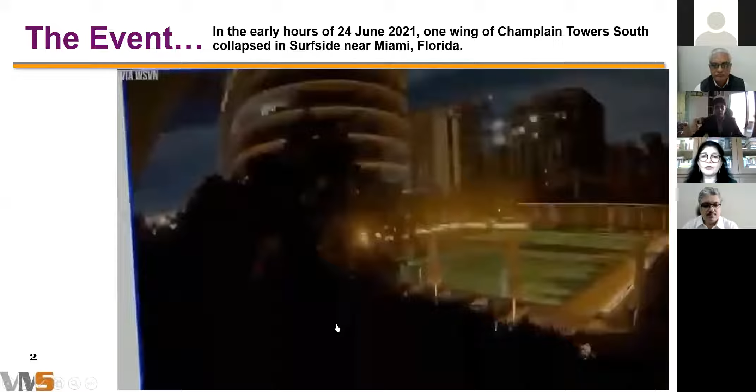Just so we have some idea of what happened, I would like to take you through what happened in real time. What you can see is the central part collapsed, and then the easternmost part of it collapsed. I think we need to keep this sequence of collapse in mind as we go further.

I think one good thing we have learned from this is how cities react and respond to such a disaster. The town of Surfside, just off of Miami, Florida, within a few days of this collapse, uploaded all the data it had access to and had in its storage onto their website. There are some documents of survey reports, but more importantly, there are 300 drawings and construction documents, which include numerous repeats and revision updates. But together, it is possible to piece together a large part of the puzzle, so to say.

I think this has really helped all of us across the world understand the possibilities of how such collapses can happen and what the vulnerabilities are. I also hope that our authorities in India will take a leaf out of this, and that data is shared after any major failure in the future, so that the culture of learning from failures is institutionalized.

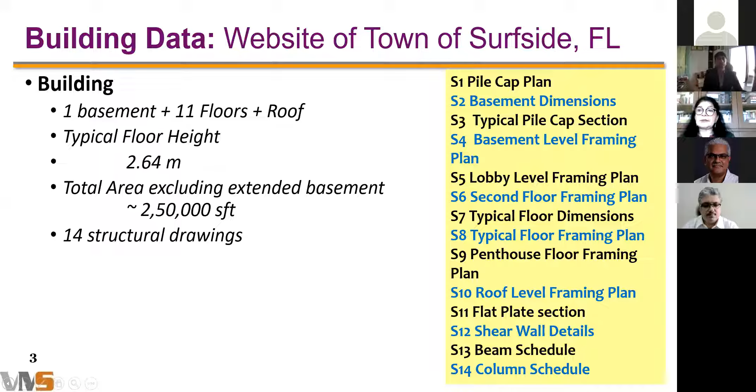While we may all marvel how somebody could realize such a feat, I think we should remember that this was a time of manual drafting, and there was a tendency to be economical in the production of drawings.

It's very different from now, when we have one base drawing, and it's so easy to produce 50 typical drawings of different floors and so on.

So now let us understand what happened. If you recollect the sequence of failure, you will remember the yellow portion in the slide in front of you was the first to collapse. The little strip at the back was the second. The first and second collapsed immediately, one after the other, and then there was a bit of a pause.

Then the lavender colored part was the one which collapsed subsequently. I think what we would do is understand what happened and why, and the green portion did not collapse, and what was the point of separation between the collapsed part and the part which is still standing, which is the western side of Champlain Towers South.

As you can see, the collapse progression was stopped by this long shear wall, the reinforced concrete shear wall. It was about 56 feet long and about 1 foot, or 300 mil, thick. Pretty much, the portion to the west of that wall has survived, and that to the east of it has collapsed.

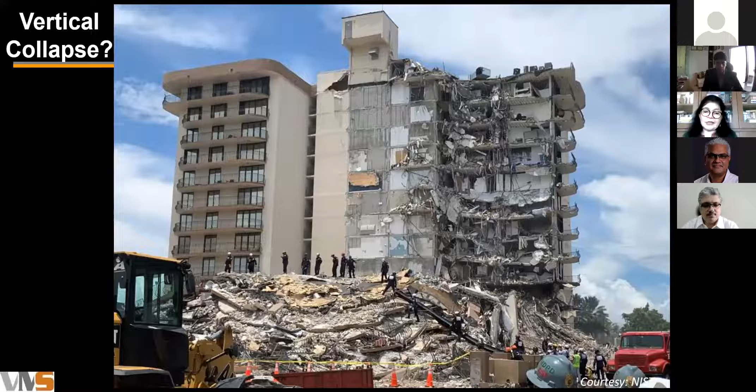So I'm going to take you through all the 14 drawings that were there, and I think that may give some indication of how and what they had done. I'm just going to walk you through the same exercise that I have done in the making of this presentation.

So basically, first of all, this area of Miami is reclaimed, and this particular building was on pile foundations. I believe a lot of the reclaimed projects, a lot of projects on the reclaimed land over there, are on pile foundations. And there are, as you can see in this picture, square pile caps and triangular pile caps.

This is a slightly dated picture. I could not find the most updated picture, because there are some hexagonal pile caps here, which actually were not really built over there. But what I would like to draw your attention to is these two pile caps, which are I-shaped, one here, and this large other pile cap, which is for the 56-foot wall.

The other point of note is that there are no tie beams. Now, Miami is subjected to a lot of cyclones, hurricanes, gusty winds, and so on, but to the best of my understanding, it's not a high seismic zone. Still, it's a point I'd like to park with you, that there are no tie beams here. So it's one more situation where you get opportunities to provide some redundancy, but sometimes that opportunity isn't exploited for reasons of economy and client pressures.

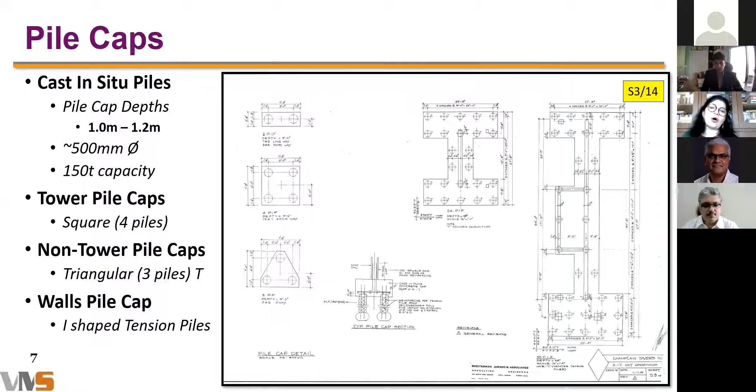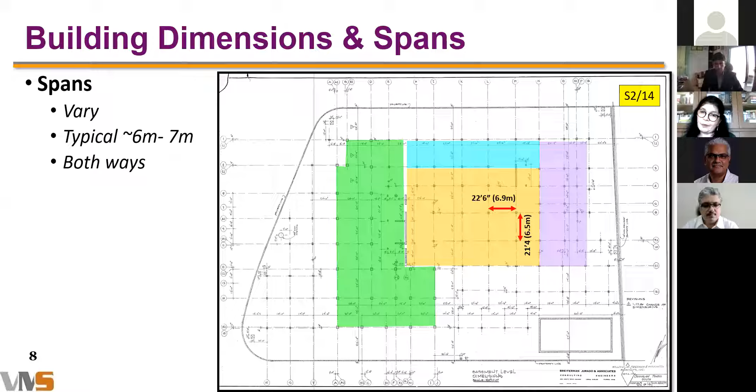Now, looking at the typical building dimensions, these were modest spans compared to today's standards. The last drawing I saw was dated early 1980, but most drawings are dated 1979, so I believe this project must have been constructed in 1980. As you can see, the flat slab spans are pretty modest by today's standards—just about 7 meters by 6.5 meters. It's not something we'd worry much about in today's times.

The basement roof was, of course, practically covering the entire footprint of the plot complex. You can see this whole region which had a suspended slab, and the three parts which collapsed, and the green which was standing. I haven't yet shown what happened, because this was the basement roof. On top of that, there was another podium slab, which we will talk about. This was the lobby level floor plate, and it also extended to nearly the full area of the plot, save a marginal space on the edges.

Now, if you look at the photographs in various media, which we'll show you more of, the area outlined in red was the slab at the lobby level, or the first floor as we'd call it. That entire slab of the first floor had given way. Only a certain portion around the swimming pool stays, but the rest has given way, except for the western wing of this tower. As I said, the basement roof was 240 mil thick, and the lobby level, or first floor, was 9 inches thick.

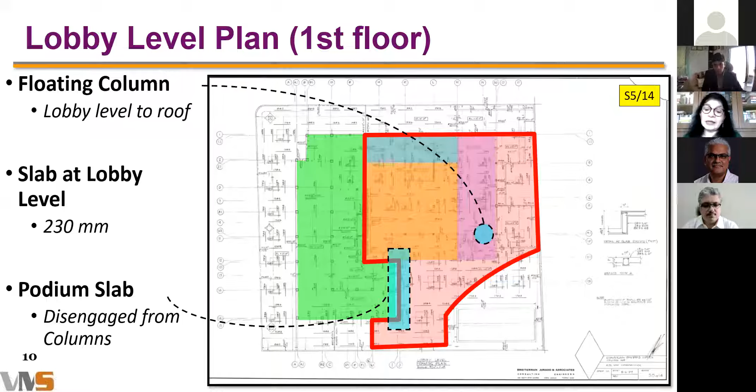If you see this blue rectangle, as you can see, there are columns on that red line, which are the tower columns for the green area, which is still standing. They also are the columns which engage the podium flat slab, which has collapsed. But these columns are still standing. So these are the columns I was talking about, which I had marked in the previous slide.

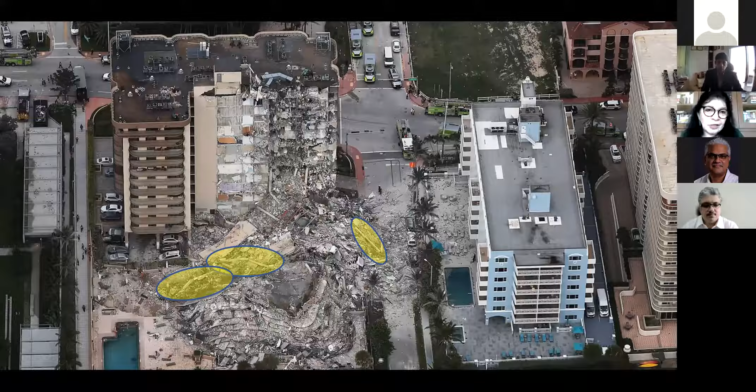I'm now going to take you to the second floor. We've gone through the lobby level, which was the first floor. This is drawing number 6 out of the 14 drawings, which is the second floor plan.

What is interesting is the east wing, which has collapsed, had 1 column which was a floating column, but the west wing, which is standing, has all of the columns—except for the upper 2 bays, meaning the northern 2 bays—as floating columns. I don't want to get distracted, but I just thought it's a fun fact to note.

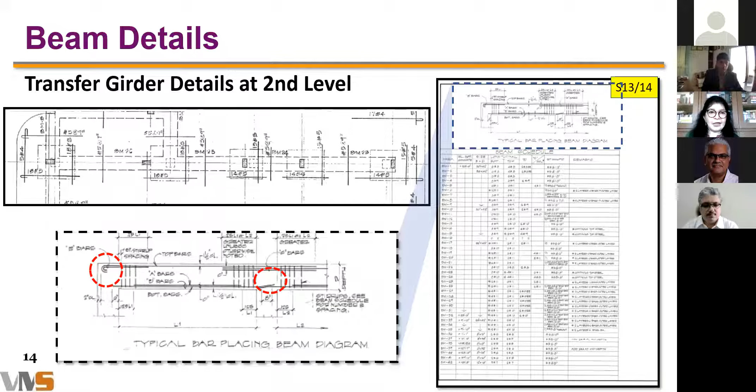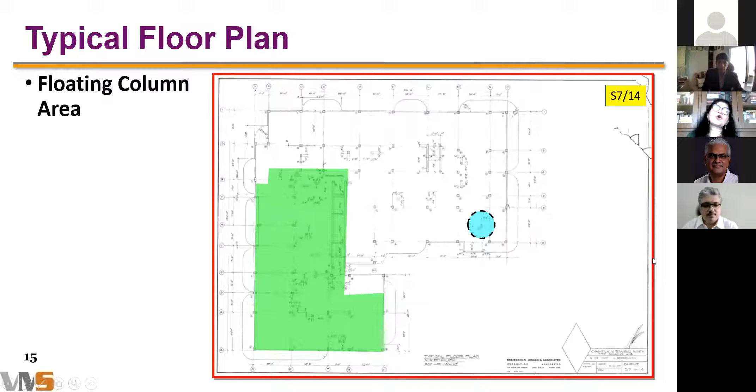But of course, again, I repeat that these are transfer girders, but that area is just standing. I've already talked about it. So this is the portion of the floating column area of the building, if I may.

Now I'm just going to show you this typical floor. I know the drawing is too small for you to see, but let me share with you the information on it. It is 8 inches thick, 200 ml thick. It's a flat plate, there are no drop panels, there are no column capitals. But as I said, the spans are quite small, 21 feet, 22 feet, and so on, 6.5 meters, 6.9 meters.

And there is a continuous bottom mesh, which is number 4 bars. As I said, number 4 would be 12 mil at 325 center to center. I guess, because I've converted it from inches into millimeters, you could consider that it was number 12 at 300 center to center.

And then at the supports, that is the cord, sorry, at the column strip, there are 16 numbers of 16 dia bars. So that works out to 16 dia at 200 center to center. And in the middle strip at the support, you have 12 dia at 300. So here in this long wall which we were discussing, what we should have seen is 12 dia at 300 center to center along the full length of the wall, because that's what the detailing is. So let's blow up this wall and let's see what really happened over there.

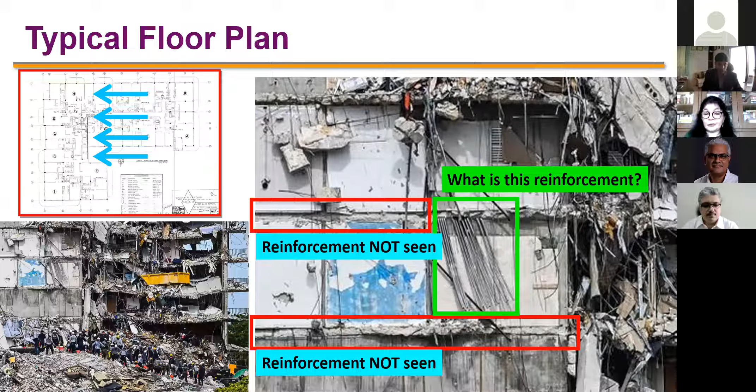Maybe it is at 300, but what is very interesting is suddenly just look at this whole bunch of reinforcement, and I'm nonplussed, because at least in the drawings which I have been able to access from the 336 drawings or whatever, I could not see this reinforcement called out in any drawing. So I think that this particular project also has some challenges in terms of the construction and how it was done, and I think that's something which will be studied in great detail by the investigators.

As everybody says, the building stood for 40 years, and it has. And these are not the reasons why it collapsed. But these are very interesting details, if I may. I think that's one thing we learned in college: just because a building stands for 40 years does not mean it was safe. It just means you were lucky.

Now let me share with you drawing number 11 of the 14 drawings. This gives the details of the slabs. This is the column strip you're looking at here, and this is exactly what I was saying: only 50% of the bottom bars have been continued, and that's okay, that's what our codes allow. But then there is only a 6-inch overlap, which is very problematic in terms of integrity.

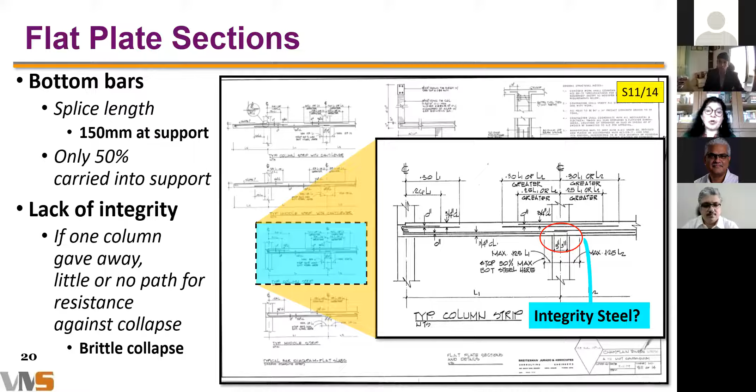As we saw in the beginning, in less than 15 seconds this building—which must have been, say, at least about 110,000 square feet, less than 50% of the building—just collapsed in less than 15 seconds. So that's something we need to mull about.

I'm going to show you this drawing, which is a simple drawing for the walls. I'm not going to comment on any of the detailing, because it's out there for you to see. If you cannot see it here, it's available on the website of the town of Surfside, and anybody can access it. There are some 336 drawings, but only these 14 are of use—the challenge is just to pick the right ones.

I've already talked about the fact that you don't have any walls east-west, and the reinforcement thickness was good—it was 300 mil, with spacing of 12 at 300. Of course, this is not a seismic area, and we're talking about a building that must have used ACI 77. Even in the US at that time, there was not much development of confinement requirements for boundary elements and so on, so we will not see that, and we should not expect to see it.

Having said that, I think there was a realization that the long walls are going into tension at the edges, and that has been addressed—addressed in the long wall, which is 56 feet.

Okay, one always leaves the fun part to the not fun part, the tragic part, but the most eye-opening part to the last. And we come to the columns. So what were the column sizes? I left it to the last.

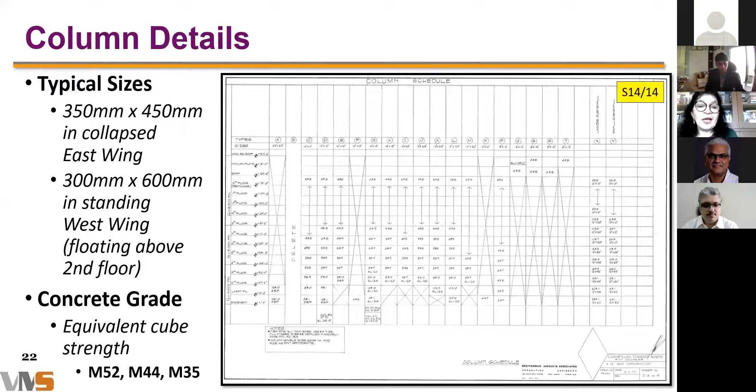The concrete grade, which is interesting for us, even in the 80s in the US, the equivalent cube strength, the FCK was M50 and so on, M52, M44, M35, and so on.

Now, if I were to talk about - I'm sorry, I'm almost, I should be finishing. Excuse me, apologies, I've taken a little more time than I should have. So I'm just going to, but because this is the most interesting part of it, I think you must bear with me.

The preliminary, I'm going to show just the calculations for this one column. I just picked one column from the east wing towards the front, but it's not the perimeter column. It's the penultimate column. Now, I did two calculations. One is as per IS 456 and SP 16. I converted the concrete to equivalent cube strength and so on and so forth.

It's Fe 415 steel. So for the estimated service load, basically I'm doing working stress and I'm not taking the full design load. I'm saying, because in design load you may take 2 kilonewton per meter square of live load, and I'm saying there wasn't 200 kg per square meter or 2 kilonewtons. So I've taken just about 0.6 kilonewton per meter square and so on and so forth. So I have calculated what would have been the estimated service load at the time when it collapsed.

And I'm getting a PU or FCK BD working out to be 0.58. And if I had to do a limit state of that, you're coming to 0.78. But when the building was designed, of course, it had to be designed for the design service loads, which would have been 0.62, and then the limit state actual stress ratio would have been 0.85. So that tells you a little bit of the story, right?

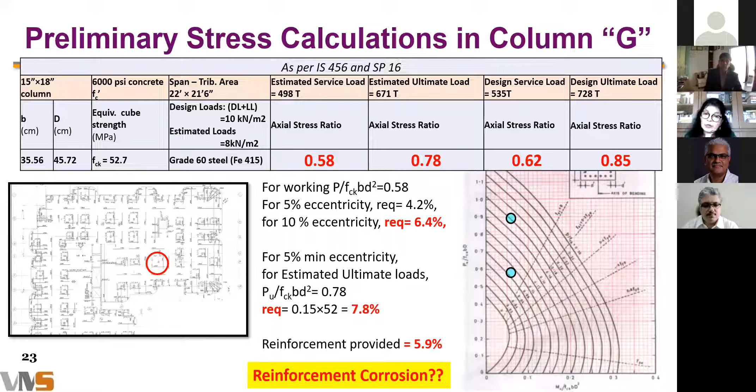What is provided is 6%. But let me show you now as per the ACI code—I won't get into the full detail since I've already overshot the time. If you look at the ultimate capacity based on the ACI code, I would get 517 tons. And what is the ultimate demand? It is 671 tons. So the demand to capacity ratio is 1.3.

Let us compare the ultimate capacity to the service demand. The capacity is 517 tons, and the present service demand as of the day it collapsed was 498. Of course, these are all very estimated, and can be off by 10%. So you can see that the service load, not even the ultimate load, was just about what was the ultimate capacity.

So if you look at this picture and this circle which is marked, this is where we were. There was practically zero flexural capacity. I think Professor Goswami is also going to talk a little about this, so I will leave it there.

I checked the punching shear. It's not a problem in terms of the capacity of the slab—the demand to capacity ratio was coming out in the range of 0.75. So punching shear by itself, the slab would not have perhaps given way unless there was a loss of a support. It's something to think about.

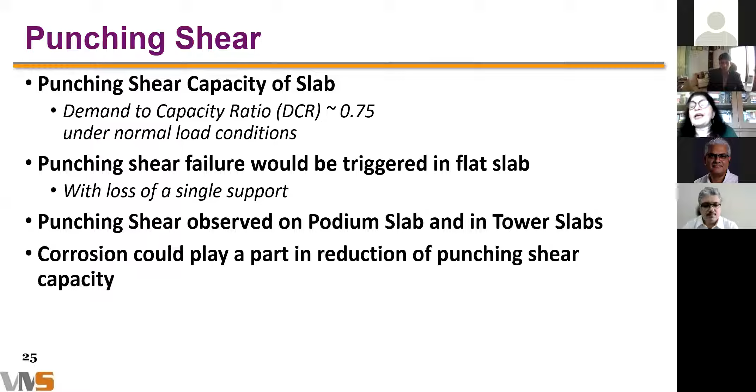The punching shear was observed on the podium slab and in tower slabs. Corrosion can also play a part in the reduction of punching shear capacity. The punching shear, or the slip of the slabs, was also happening because of the lack of anchorage between the wall and the slab.

So if I show you the punching shear on the podium, you can see all of these columns standing there, and you can go down to the base and see the punched slab over there. That's the punching you're seeing in the podium slab outside the tower. And if you look at this picture carefully, you'll see some of the tower columns also exhibiting punching shear—you can go down to the base and have a look. These are all pictures on the web; take some time and zoom in, and you'll be able to see it.

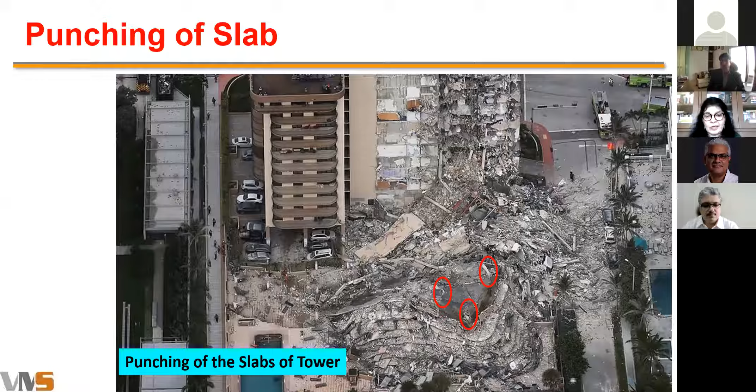So this is really all. I've taken you through all 14 drawings and what we could glean from the information available, also doing some calculations which are not really a very detailed analysis. But there were a host of stories which emerged just from very basic calculations.

And just in closing, I'd like to say that we all know it suffered a brittle, sudden and cascading failure. Whatever information we've been able to access and our preliminary calculations seem to suggest that this vertical downward collapse may have been triggered by a column failure, because as I walked you through, the design of the columns was marginal. There is very little redundancy in this type of structure, and it's compounded by the fact that all the anchorages at all the junctions, at the connections, was rather poor.

And there was no requirement of integrity steel in the flat slab, so there was no possibility for the flat slab to fail gracefully and give some amount of time for a possible egress, even for 10% or 20% of the people, if there was time. But 15 seconds—nobody can do it. Actually it was less than 15 seconds, it was 12 seconds. And as I said, the reinforcement of the slabs was not placed as per the drawings.

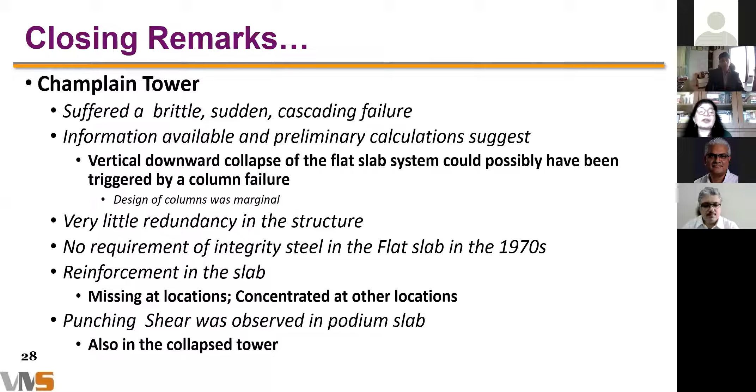As we saw, reinforcement was missing at locations, and at some places it was just bunched up. We don't know how that happened. The punching shear situation was observed in the podium slab and in the collapsed tower, but its reasons are not fully clear—that may have been a secondary collapse, triggered by a primary collapse. Okay, that's all, folks. Thank you very much.

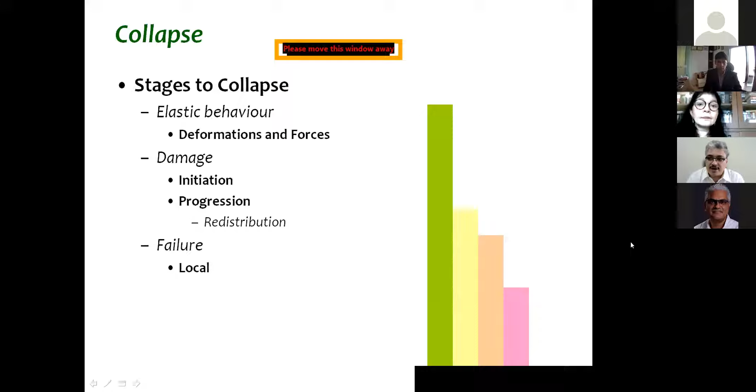Going further, there can be failure, and failure is again not collapse. There can be failure of an element or one component, which is a local failure. And again, if we allow for redistribution, I'm sure you'll agree, a structure should not collapse.

So what is collapse? Collapse happens when we allow a damage to progress to a collapse or failure level, and then we do not contain that and do not allow redistribution of forces to happen within the structure. That is where we see a global collapse.

So it's a long process, and it's not easy for structures to collapse. That's the first idea I thought we should all have in our mind. So when we see a structure which has collapsed, we need to understand that there must have been some basic fundamentals which were missed so as to cause this.

So how does this whole thing happen? As I said, damage can be good damage or bad damage. Essentially, I'm talking about ductile versus brittle actions. So when there is force loading, if we do not allow redistribution, the gap between the initiation of the damage to final collapse can be very fast. That is why we always think of having a more prolonged plastic deformation capacity available in structures.

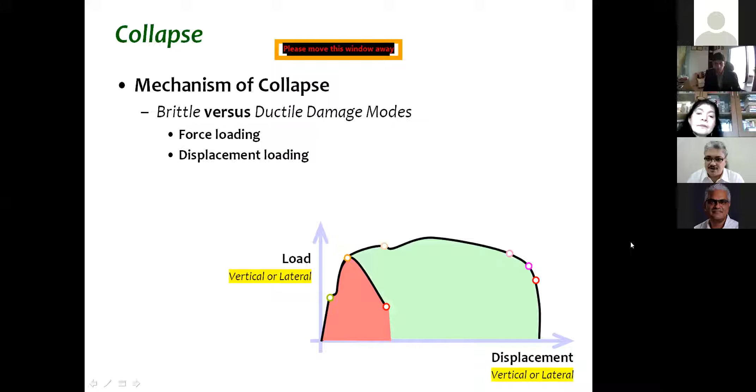Now, when you see this drawing, don't think I'm talking about lateral load, lateral displacement relation. This is true even for vertical deflection analysis under simple gravity loads. And that is where we are all taught the difference between over-reinforced and under-reinforced sections, shear versus flexure, and so on and so forth. So I'll continue to use this load deformation graph, which applies for both vertical as well as lateral actions.

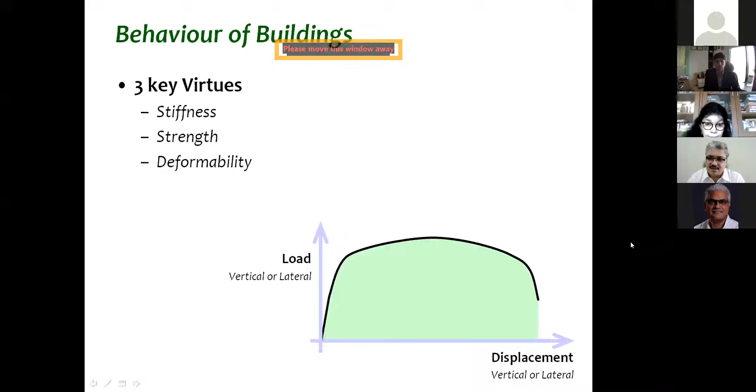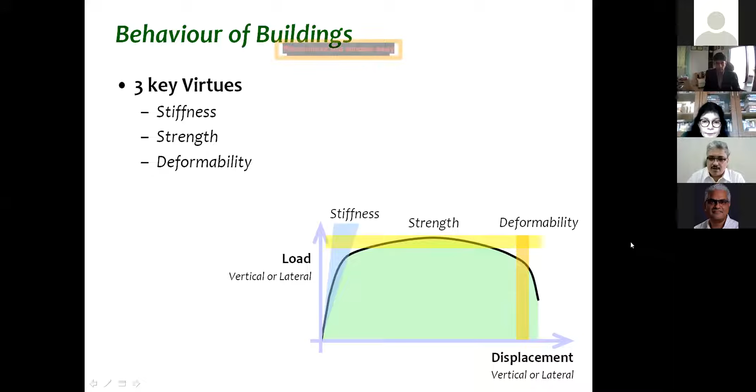Talking about good structures, they need to have at least 7 key virtues. But the first 3 quantifiable, most important virtues are stiffness, strength, and deformability of a structure. Let us look at each one of these one by one.

When I talk about stiffness, we need to first talk about vertical stiffness. It can be due to the soil. So the first item is the soil. We know there's long-term, short-term deflection, deformation, consolidation, and so on and so forth. But what is important is to understand if there is a possibility of differential settlement due to soil and due to foundations.

The next most important thing is vertical elements, and needless to say, in most buildings that we design, these are our columns. Today we have a situation where we want to move to high grade materials, high grade concrete, high grade steel, and the first motivation for going for these is to reduce sizes of vertical elements.

What does it lead to? Small sizes will lead to low axial stiffness, and there will be axial shortening of members. And if we do not account for this, simple unequal axial shortening will induce additional stresses in our systems.

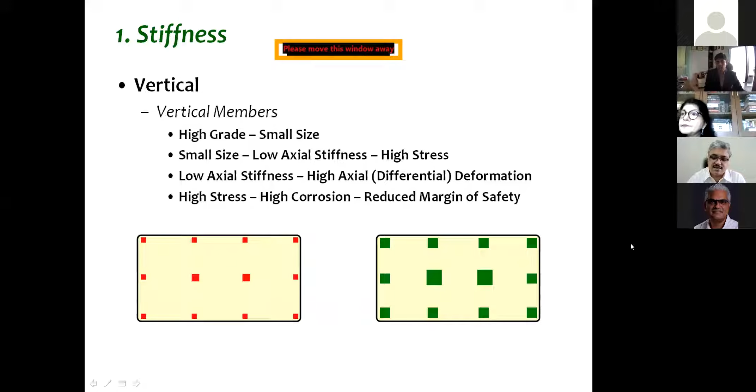So how do we address this? Is it time to think of a certain minimum structural plan density, not from lateral load resistance point of view, but simply gravity load resistance carrying point of view? We need to think in this line, is what I believe.

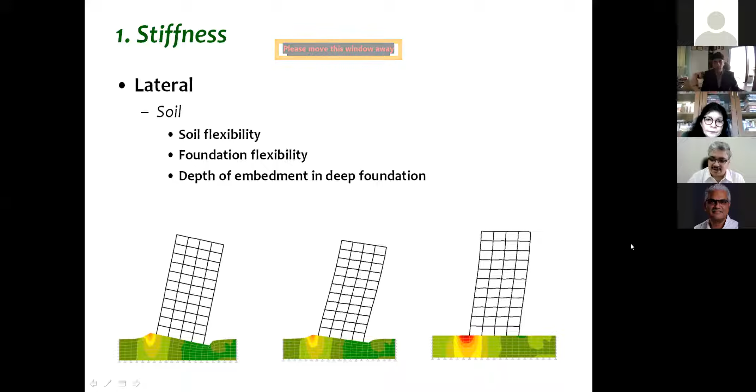Moving on to lateral actions, again, the first issue is soil flexibility, foundation flexibility, as always, and in pile foundations and things like that, the depth of embedment. We often do not take into consideration some of these items so precisely, and these do affect lateral stiffness of a structure.

This is where I want to bring in the issue of having walls in a system. So what we see is, walls offer significant amount of lateral stiffness to our buildings, which effectively helps reducing displacement. Moment frames are good, but they are much more flexible compared to wall frame systems, and so lateral deformations, even due to simple eccentricities and normal lateral loads, will be much more in moment frames compared to wall frame systems.

But what is a moment frame? Moment frame is when we have a horizontal member and vertical member acting together. As two extreme examples, we are seeing a situation where we have a column and a beam, and the beam on the left side is stiff enough, meaning it has sufficient size and stiffness. Whereas on the other side, we have a very flexible beam, or sometimes no beam. In which type of systems do you have such beams which are missing?

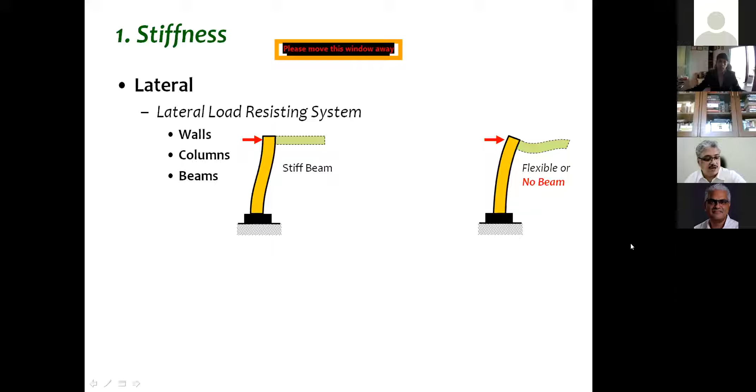So what does it lead to? If we look at the vertical members, the stiffness of the horizontal member, the beam, critically affects the bending moment, the actions that develop in the vertical members. So while we consider our columns to be bending in double curvature, what happens is, in the absence of beams or adequately stiff horizontal elements, these columns are subjected to significant amount of bending actions, additional flexural actions, which often we might not consider in our design.

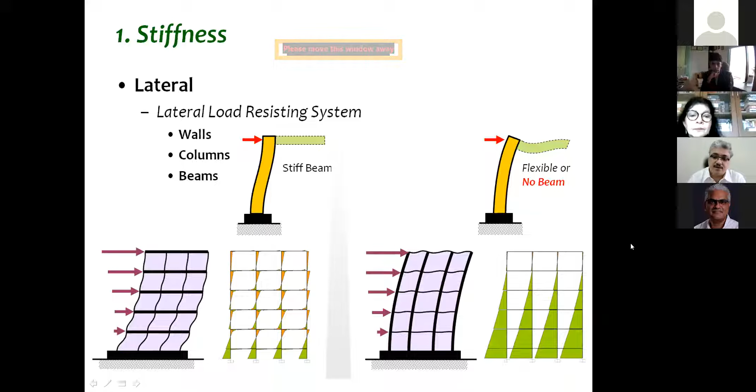This next issue is about connections. So we have the horizontal member and the vertical member. What about the connection? We might have a good horizontal member, but if the connection is flexible enough, or in situations where the connections fail, again the same situation happens. The columns go in single curvature bending, and significant amount of additional moment gets generated, in addition to, remember, the high axial stress ratio that it is already carrying.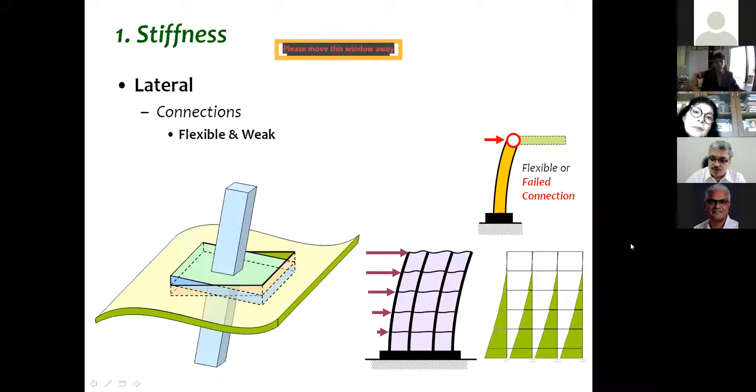So now you can imagine what is the expected fate of these columns. Effectively, if you see a system which doesn't have a good horizontal element, or where there is a chance of failure of the connection between the horizontal element and the columns, you can safely say that those structures have no lateral load resisting system. Because once there is a failure in the connection, there is no scope for any redistribution in those structures.

Moving on to the next item, which is strength. I started off with damage, and damage is always related to strength. We know that there are good damages, ductile damages, and bad damages, brittle damages. So we say that we need to allow damages to happen in certain good places in a structure, and usually those are the beams. But if you do not have beams, then what you are left with is only allowing damage in all the bad locations, bad choices of locations that you have. You do not want damage in your joint, in your connection. You do not want damage in your vertical elements. But that is what we'll be left with if we do not have these beams.

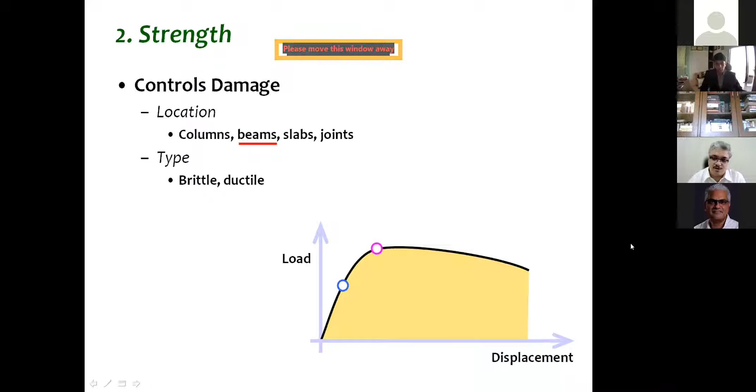And needless to say, any type of damage in these members is not going to be ductile, but very brittle. And so the gap between the initiation of the damage to final total progressive collapse is going to be very short.

Let's look at this PM interaction diagram a little more closely. All of you can recognize that this diagram is from our SP16. We all have used it, and it has been in existence for decades now. I'd like to draw your attention to these radial lines in particular. I have highlighted one radial line towards the bottom of the diagram in green, and another one in orange at the top. When we provide reinforcement, we want the reinforcement to go in tension, because that gives us the possibility of allowing yielding of the reinforcement and giving us a ductile kind of action.

If you cross over the orange line, in SP16 that is written as FYD equals 0. That means there is no tensile stress in the reinforcement. The entire cross section is in compression, and so failure is going to be governed by sudden crushing of concrete alone. Steel is not going to help. So no matter how much reinforcement we provide, the failure is always going to be brittle in nature.

Let's look at the PM interaction with a little more detail added to it. We have always seen the diagram, but another important thing to note is that at each of these axial load levels, if you draw the moment curvature or moment rotation, you will see that below the balanced point and up to the balance point, the failure is ductile. That means the reinforcement provided is actually acting and making it ductile enough.

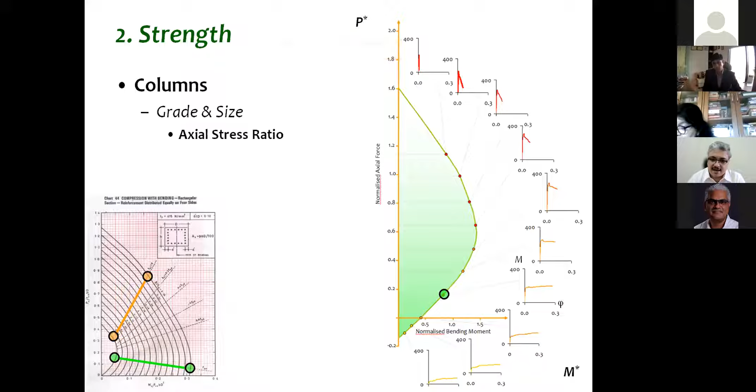But when we go for very small size columns with high axial stress ratios, three things happen. You're already very high up here, and we know that the failure is only going to be very brittle in nature, and there's very little margin, not enough to accommodate additional moment that may get generated due to various accidental reasons or lateral loads coming on it. So the only way these kinds of systems will fail is in a very, very dangerous brittle mode.

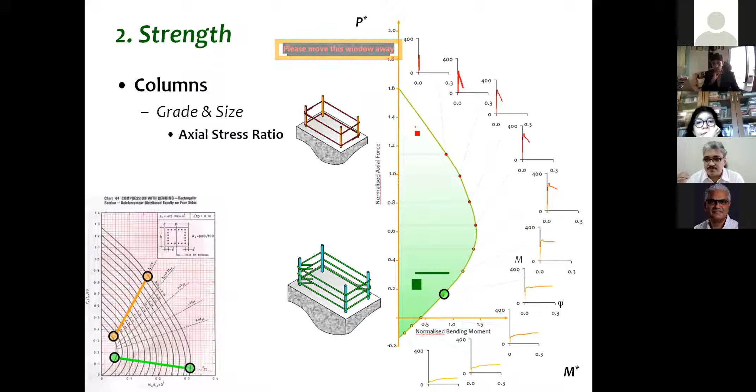That is why in some codes, at least, they say that we need to have a limit on the PM interaction diagram below which we should design our columns. If we cross that limit, we get into dangerous territory. And I think that is something we need to critically look at.

The third item, of course, is deformability. Note, I haven't yet spoken about ductility, because collapse is that deformation after which the system is rendered unable to carry even the self weight. When somebody faints, we say the person collapsed, because they're not able to stand, not able to carry the weight of the body itself.

So in this whole process, until collapse, there will be damages. And we want redistributions to happen so that many more locations participate in this process until the final collapse happens. That will be possible only if we provide for redundancy in the system. If there is no redundancy in the system, collapse will be very sudden and brittle.

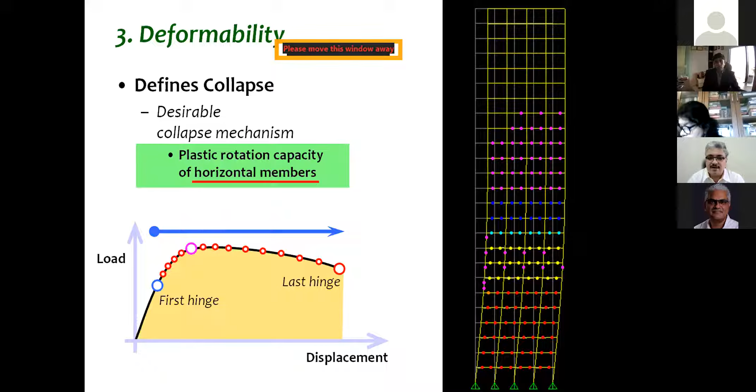And finally, when we try to talk about having an enlarged plateau length of plastic action, one important thing to remember is that the first location of first damage should continue to have plastic rotation until the collapse point. If the first point fails, the collapse happens when it reaches its deformation capacity or deformability. So if we want our structures not to collapse by providing adequate deformability, the location of first damage has to have that plastic deformation capacity. If we do not ensure that, structures are likely to collapse.

So if I look at it, really speaking, structures should not collapse. All the good things that we were taught in our colleges had many elements in them that would usually not allow structures to collapse. But when we start putting all eggs in one basket, we put ourselves and our structures at risk.

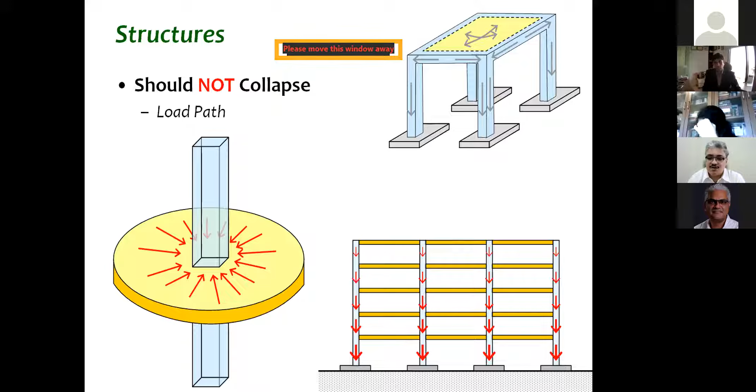When you have a system like this without any load path, other than allowing or making all the forces run towards one point in the structure to get transferred downwards to the foundation, we are inviting trouble. And progressively as you come down these columns, vertical members, if their axial stress ratio is not controlled, then of course we are likely to see brittle failure.

So in summary, I'll say that while we pay a lot of attention towards lateral load resisting system, what appears to be very important and coming out through this exercise is that we need to care about gravity load carrying elements first, because gravity loads are going to be there 24/7, 365 days a year. We cannot miss out on the gravity load carrying elements.

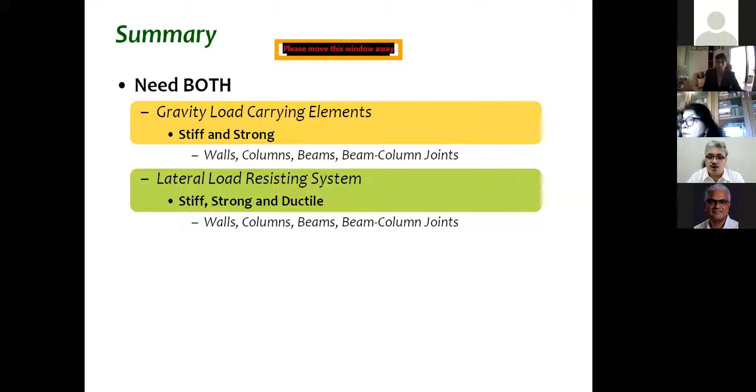They need to be stiff, they need to be strong. We need to ensure this. Then, of course, we need to ensure that there is adequately stiff, strong, and ductile lateral load resisting system, because there can be accidental eccentricities and lateral loads coming on the structure, even if we do not envisage such things at our design stages. And finally, redundancy is very, very important in our structural design.

So I guess we have a lot to think about before finalizing or saying what exactly we need to do in terms of our design.

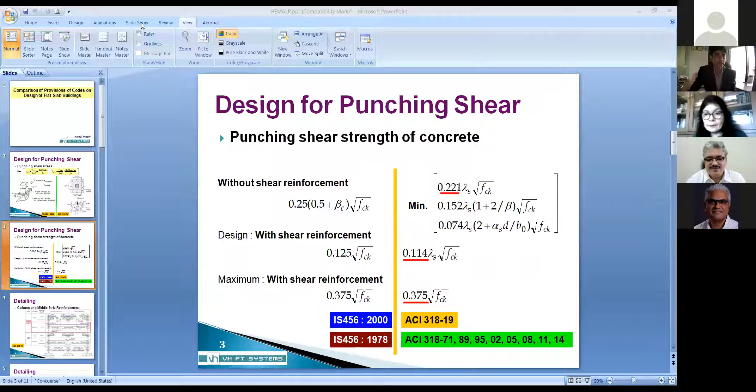I am Hemal Mistry. Today I am going to discuss design of flat slab and various codal provisions in international standards and in Indian codes. I will focus on punching shear design and on detailing of integrity and redundancy reinforcement.

For punching shear stress, the requirement in IS 456 and in ACI 318 are similar. The critical sections are at D/2 from face of supports. The shear stress shall be calculated by combining shear stress due to unbalanced moment with the normal shear stress. Only one moment shall be considered at a time.

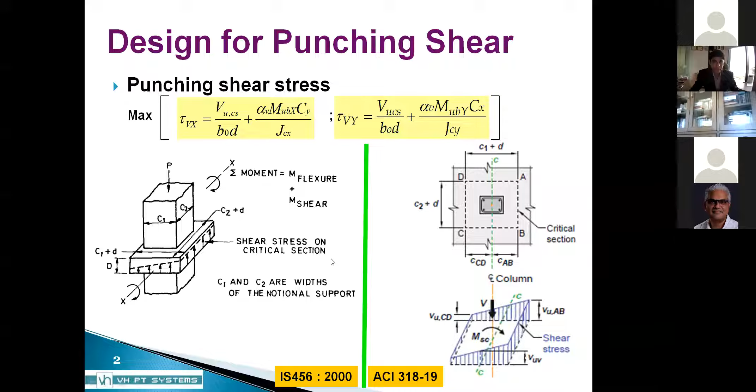Now, this calculated shear stress shall be compared with the capacity. The punching shear strength of concrete, which triggers the requirement of shear reinforcement, can be calculated as 0.25 square root of FCK into 0.5 plus beta c. That factor beta c takes into account the effect of aspect ratio of column.

In ACI, three equations are proposed, and that takes into account the effect of depth of slab, the shape of column, or aspect ratio of column, and location of column, whether it is interior column, edge column, or corner column. Generally, we do not have edge or corner column as IS 1893 requires a stiff perimeter beam. Also, it takes into account the effect of critical perimeter, size of critical perimeter.

Recently, the depth factor lambda s is introduced in ACI 318-19. And as the depth of section increases, the shear capacity of concrete reduces according to this factor.

Now, once the shear reinforcement is required, the shear strength of concrete shall be specified. The requirement is more or less similar in both the codes, except the depth factor is introduced. This depth factor can be neglected if some minimum shear reinforcement is available. Also, the equation specified is applicable when stirrups are used as punching shear reinforcement. Some more shear capacity is allowed when stud shear reinforcement is used.

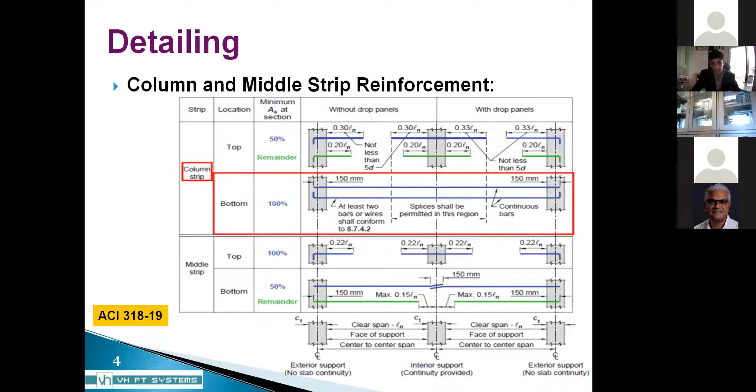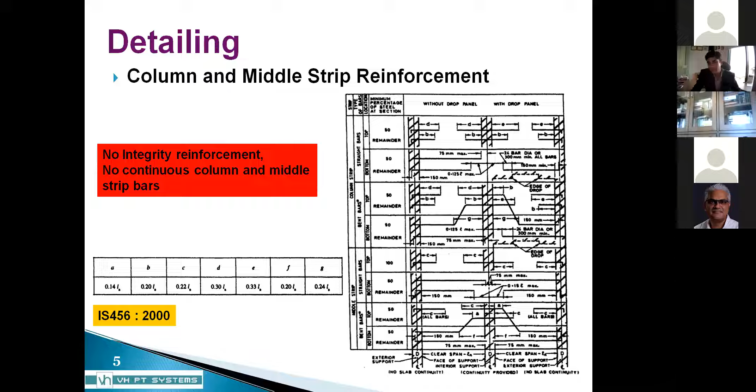The detailing is also specified in IS 456 for flat slab. However, there is no continuous bar for column strip and also no continuous bar for middle strip. They specified certain curtailment for all the bars. No bar is continuous from the interior support.

In ACI 318-19 and in IS 456 also, we are required to concentrate the top reinforcement in the effective width. This reinforcement is generally designed for the flexural part of unbalanced moment. However, in ACI 318, some minimum requirement is also specified. This reinforcement is very important to prevent flexure-driven punching.

When the reinforcement is very less than the specified value, it can yield, resulting in sliding along inclined cracks, which are formed at shear stress well below the shear capacity of connections. In such case, with low reinforcement, the contribution of punching shear reinforcement to shear capacity will be very less or nil. But however, it can help to allow some plastic rotations. Such requirements are not available in IS 456.

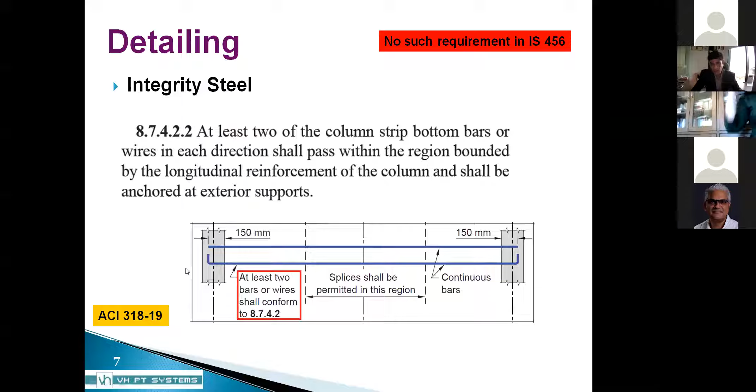As we discussed before, ACI has a requirement for integrity steel. There shall be minimum 2 column strip bars, which shall be extended in support for development length. The supplementary document of ACI on slab column connections has a very stringent requirement for this integrity reinforcement, worked out considering actual factored load on the panel and panel dimensions.

For evaluation of this reinforcement, a model has been considered where punching shear failure has occurred, top concrete cover is removed, and bottom bars are bent at 30 degrees from the horizontal. This requirement may be very stringent, and the reinforcement required by this clause may be very high compared to what is required from ACI 318. It is also recommended to have this reinforcement for beam column connections where the depth of beam is less than 2 times the depth of slab.

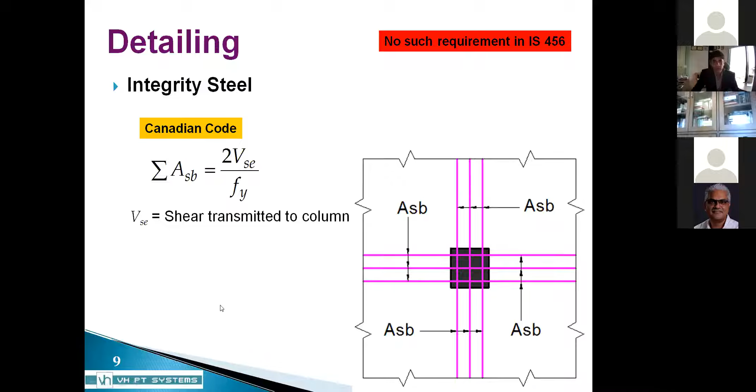The Canadian code has correlated shear with the integrity reinforcement: the slab reinforcement connecting the slab with the column perimeter shall not be less than 2 VSE by Fy, where VSE is the shear transmitted to the column. We don't have any such requirement in IS 456.

Eurocode requirements are similar to ACI 318-19. It also requires two column strip bars to pass through columns in each orthogonal direction. Our priority shall be to prevent shear failure of slab column connections, but when the demand is extreme, like in the event we are discussing today, there must be some integrity reinforcement which can provide an alternate load path and some reserve capacity to transfer the load to stiff adjoining elements. Also, the adjoining elements shall have reserve capacity for such undesirable events.

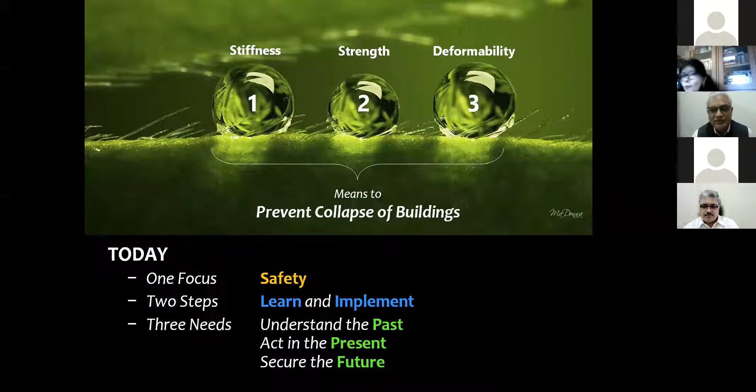I must also take this opportunity to mention that IS 456 is under revision, and in fact this is the 5th revision that is underway. We are doing this revision almost after about 40 plus years, 43 years. This is a wonderful opportunity for us to see what is good in terms of the provisions required to ensure no collapse, especially in flat slab buildings. So the meeting today is actually very valuable in trying to carve the provisions for the new version of IS 456.

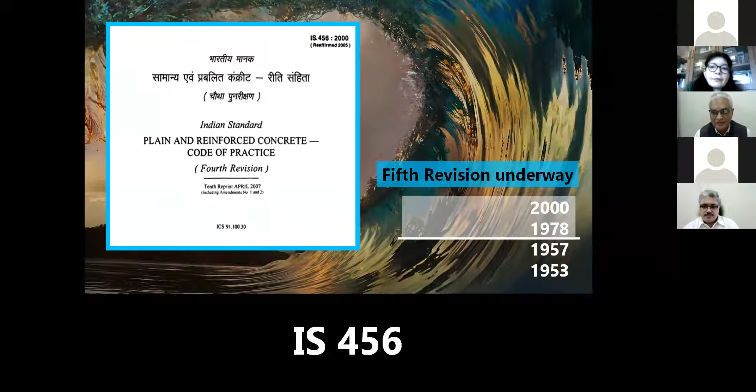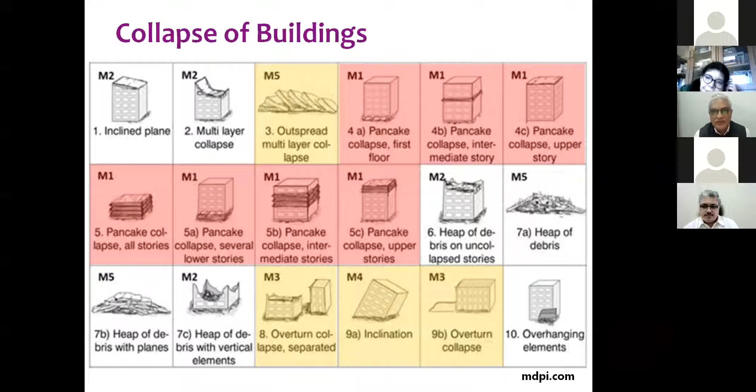When I look at the internet literature available on collapse of buildings, I get this very interesting picture in which about 7 cases of pancake possibilities are there, and about 4 cases of lateral collapse are there. But there are many other localized issues also highlighted in this slide. My take on this entire slide is that none of these is actually acceptable for us, and that is the backdrop of all that.

There is no way we can allow any building to go through any collapse of whatever kind. Even if it means certain structural systems are not good and we should drop them, we'll definitely drop them. So here is where we need to understand the importance of the loading that we are imposing on the various buildings.

There are 2 types of loads: force loads and displacement loads. As you can see on the right-hand side, displacement load is not taught in colleges in a normal sense, except in passing about settlements and foundation settlements. The rest are done only in passing, at least in India.

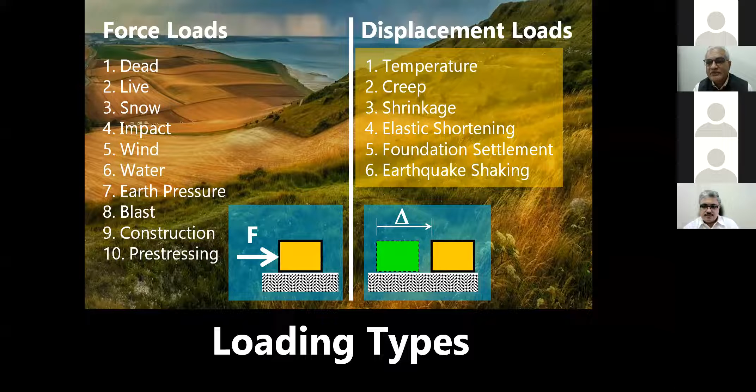When you look at flat slab buildings, all the displacement related loads are going to cause a lot of worry for us. That is where we need to strengthen our provisions to make sure these issues are considered.

Let's look at the displacement loads a little more carefully. We're looking at temperature as a possibility, heat and temperature. Second is elastic shortening when we make certain members too small. Creep and shrinkage come alongside that. If you have overstressed a column, you can get into long-term creep effects as well as shrinkage due to certain choices of materials.

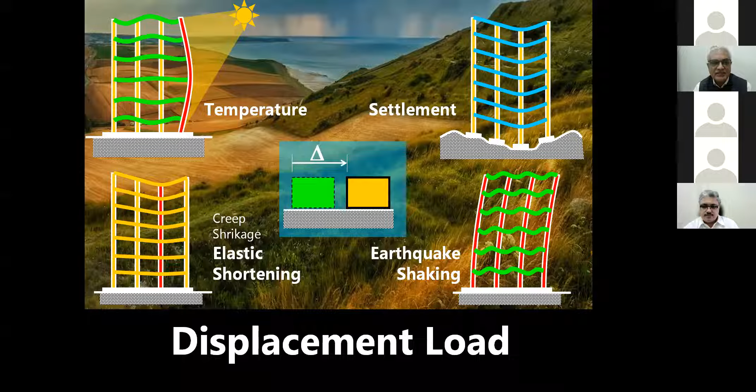Settlement is another matter that will be a worry for us. And of course, lateral actions of earthquake shaking will be a displacement load we need to be careful about. All 6 of them will be our worry.

To emphasize what Professor Goswami said, it's convenient to have elastic behavior, but that can be expensive, so one allows a certain amount of inelasticity. So we have a design load, then the end of the linear range where damage begins, then the maximum load, and finally the building collapses.

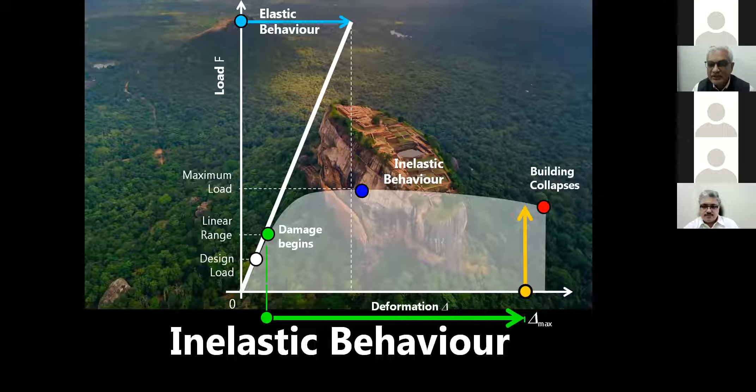What we are interested in is to estimate delta max, which gives us the range of inelastic behavior. The entire process of going from linear to nonlinear behavior is possible because ductility is available. If this ductility, this deformability, is not available, you cannot do this inelastic action at all, and you have to resist everything elastically.

We also notice two other contributing factors: one is redundancy, the other is overstrength. Let's look at buildings with flat slab. We see that they don't have ductility, they don't have redundancy, and the only thing that could have been there is overstrength. But if we compromise on column size and make them very slender, we also lose the overstrength that could have been possible.

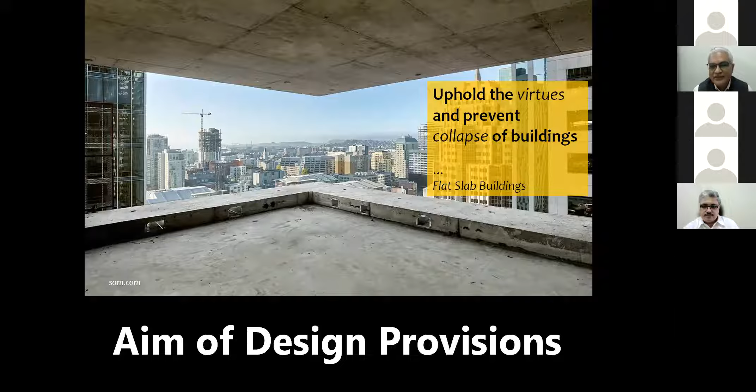On the whole, we are looking at a system that doesn't have most of the desirable features, and hence this deformability, or the warning before collapse, is not available for us, and it will be rather brittle action. So the aim of all design provisions related to buildings and safety is to uphold the virtues that Professor Goswami mentioned, and by all means prevent collapse of buildings. Especially with flat slab buildings, this will be our key worry.

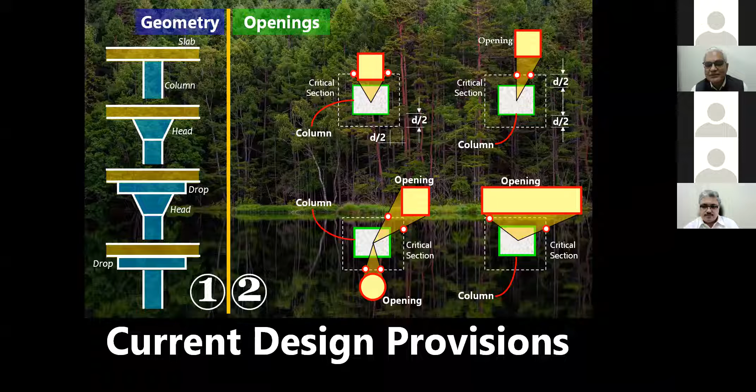Let's look at the current design provisions in the Indian standard. The first two are geometry and openings. Geometry defines the sizes of heads and drops that we can have or should have. On the opening side, it talks about the proximity of openings to columns and their impact on the critical section for shear, especially for punching.

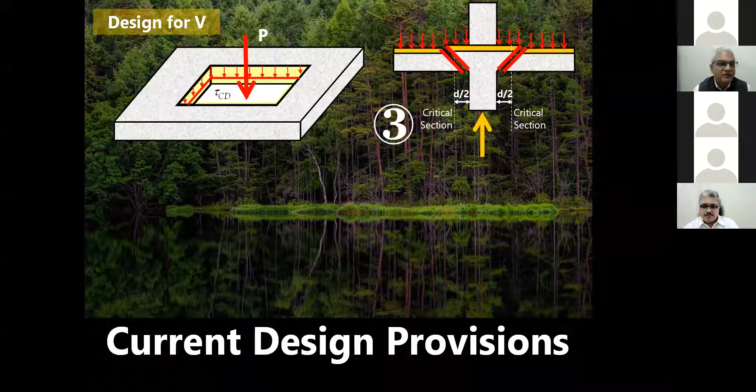The next provision is design for shear, and we understand the critical section. If we have axial load only in the column and no bending moment, or bending moment only with no axial load, or both together, we know how to estimate the shear stress demand on the structure and ensure it is less than the capacity available. These are the provisions Hemal Mistry just talked about regarding permissible shear stress values.

The fourth and fifth provisions relate to design for moment and slab reinforcement. This is classical information we've been adopting: middle strip and column strip. We have bending moments and two methods to estimate them, and then finally the slab reinforcement that we provide.

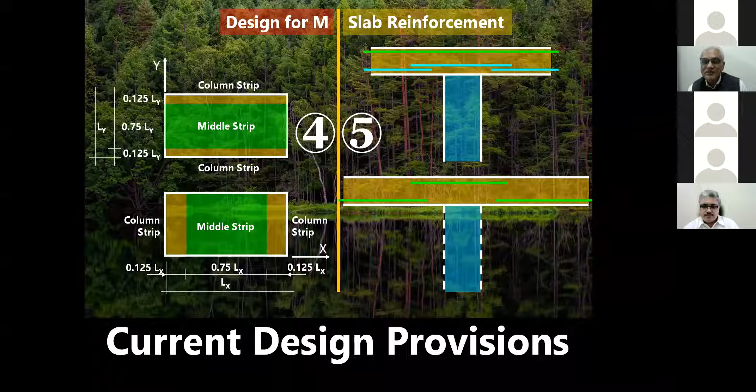As Hemal Mistry said, there are concerns about the way we are providing reinforcement as per our current IS 456 edition, and so we need to definitely revise those clauses.

On the whole, when you look at a flat slab system, we don't take solace under the provision of providing drops and heads. These are only local effects we are looking at, but the global issues are still at large. Even for little lateral unsymmetry, we will require large amounts of stiffness, and that is not available.

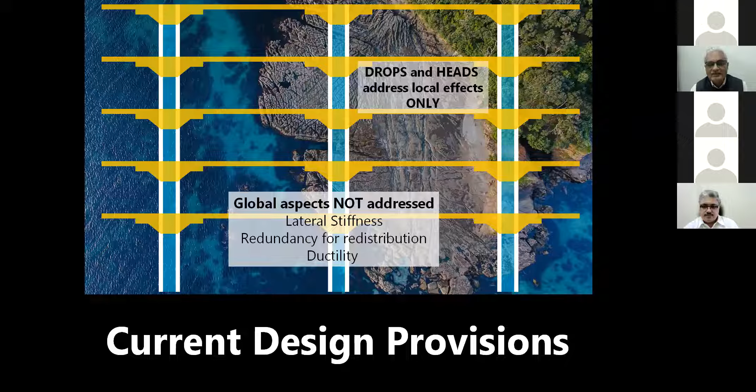We don't have redundancy for redistribution. Just in case a member has some distress, it can't take help from other members. And the way we are loading large columns with large loads on small column areas, even ductility will be a worry when we go to the apex of the P-M interaction diagram. So we need to bring global aspects into the design provisions in the time ahead.

So what is the aim of design provisions? The new set is meant to uphold all the virtues we talked about, but also ensure that lives are saved. It is heart-wrenching to hear of a building collapse when we lose people. I think we have to use this as an opportunity to resolve that we will not have provisions that can cause such collapses.

So when you look at columns and walls with flat slabs as one unit, urgently we need to make sure there are basic configuration-related features that we guarantee in our new provisions. Second, the focus has to go on analysis of the combined structure with columns, walls, and flat slab, and not simply rely on the direct design method or the equivalent frame methods in the code. The reason is that we don't read the assumptions.

We just use those methods indiscriminately for all cases. I think if you read the assumptions, they're pretty sharp and strong, and we would not have built many of the buildings we already have. The critical part is to bring back into focus global issues of overall stiffness, overall strength, and overall deformability of the building. Even if it means that in some cases we will not be able to build flat slab buildings, I think we should bite that bullet, because the consequence of collapse is not acceptable to us.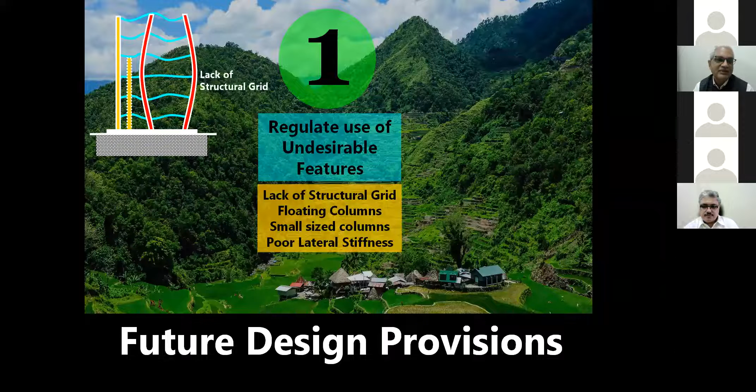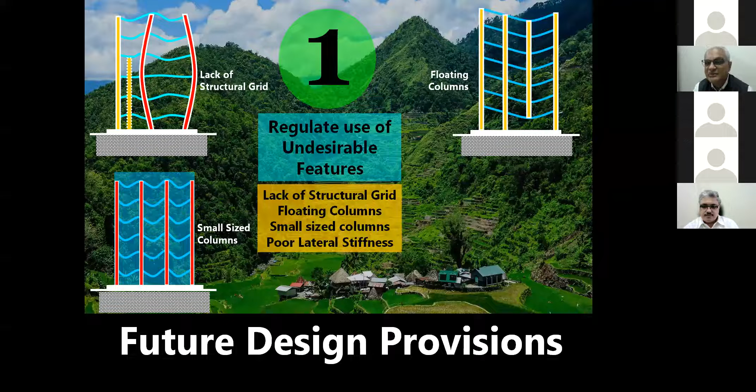These are loud statements we have to understand: if the grid is not available, then the geometry and deformation are not going to be acceptable. If columns are small sized, you will see undue stresses. If it is floating columns, you will see undue behavior. And if it is poor lateral stiffness, you will see no help coming even under vertical loads. So configuration and a desirable collapse mechanism is our target.

So we will not be able to tolerate some of these items. We have to write more explicitly than as mere assumptions in the explanatory notes; they have to come into the main clauses themselves. The second statement is about combined analysis.

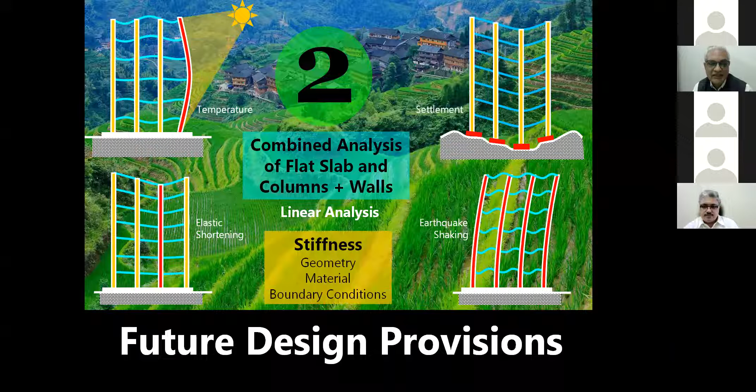We are doing largely linear analysis, and hence when you look at a system that is likely to go into nonlinear behavior under temperature, elastic shortening and settlement, and lateral shaking, we need a lot more constraint on the use of this system, especially checks and balances from the point of view of overall stiffness.

So the geometry of the structure, symmetry and spacing of the spans and so on, material, high grade or low grade, and then boundary conditions, especially related to the support. Third item is related to design.

First item is stiffness, and in all of these cases we want to make sure that the vertical stiffness is assured. Columns are the ones that will keep us in trouble if we are trying to be miserly about it. Important point is settlement cannot be handled by structural solutions; the settlement has to be sorted out before we get the structure on the strata.

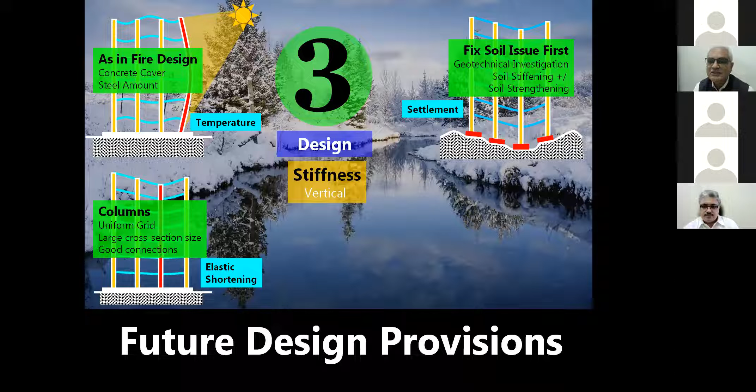So we have to fix those issues or understand those issues, and only if it is possible to accommodate that in structural design should we consider that. Otherwise, we should even go to the extent of dropping that site, right? So geotechnical investigations required should be our focus.

Design stiffness in the horizontal direction—again, earthquake shaking is our issue. By providing structural walls, you can choose a uniform grid and large cross-sectional sizes and good connections and make your structure survive.

Because if you are looking at the load deformation curve or the stiffnesses of the buildings, buildings without walls, flat slabs don't have any appreciable stiffness, and that is where we need help, and the help will come in the form of walls into these new provisions.

I hear a lot of concern about the use of a very stringent requirement in IS 1893 of 0.1% lateral drift. But if I look back at the research work done by Professor Durgesh Rai and a student at IIT Kanpur, they do say that the lateral drift, based on about 300 or so experimental data, tells us that we don't have much capacity in flat slab buildings. And so we have to keep the lateral drift as low as 0.1%, right?

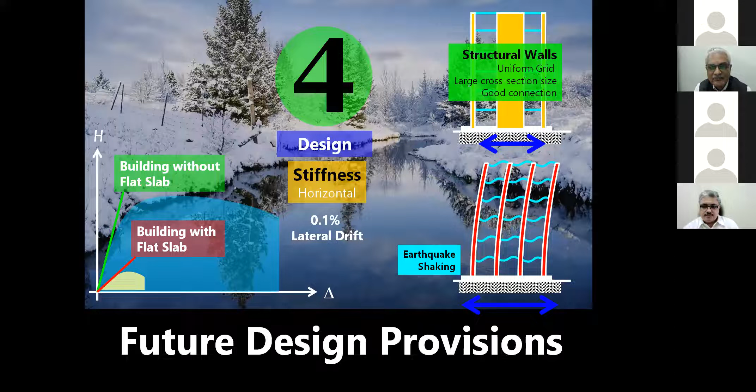And the next item is design for strength, both horizontal and vertical. A key question I have is, if this is the expression for design for axial load where concrete contribution is 0.4 FCK, I do see that the axial load, axial stress ratio that we calculate simply by dividing axial load with FCK and the area of cross section of the column, should be far less than 0.4, but somehow we seem to be shying away from taking that decision.

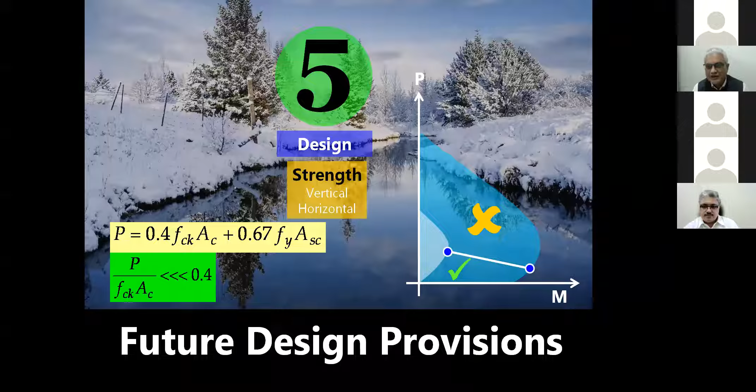Maybe this is the time, when we look at the collapse, that we don't feel comfortable having the liberty or luxury to go with a larger number now. Both Alpa Sheth as well as Rupen Goswami emphasized on the PM interaction diagram. I'll reiterate that it's time to get closer to the balance point and not go unbalanced at a much higher elevation—that will be tough for us to handle.

So the sixth item is detailing, especially integrity steel, which we need and we don't have right now, and that is our worry. We need to put in some stringent requirements for integrity steel.

When you look at the deformability issue, whether it is vertical load or horizontal load, there is a need to understand the collapse mechanism, and only then should you be able to sign the drawing for construction. Without preempting the collapse mechanism, we should not take chances on these very special structures which are being built across.

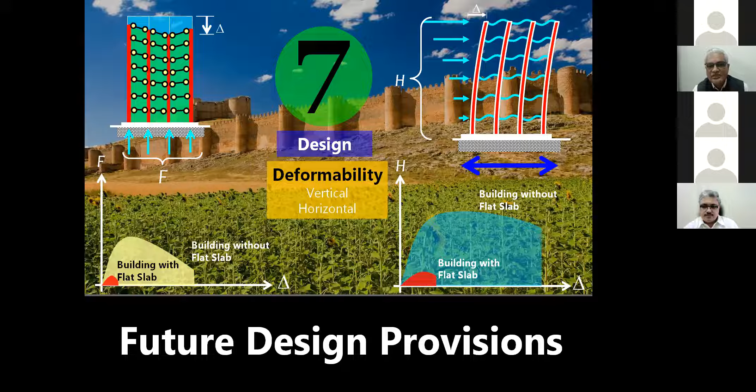I'll close this discussion today by saying the key virtues of flat slab buildings are highlighted: it is strength, stiffness, and deformability. And we need to protect that, or ensure that in our buildings, especially the inelastic range, we need to understand.

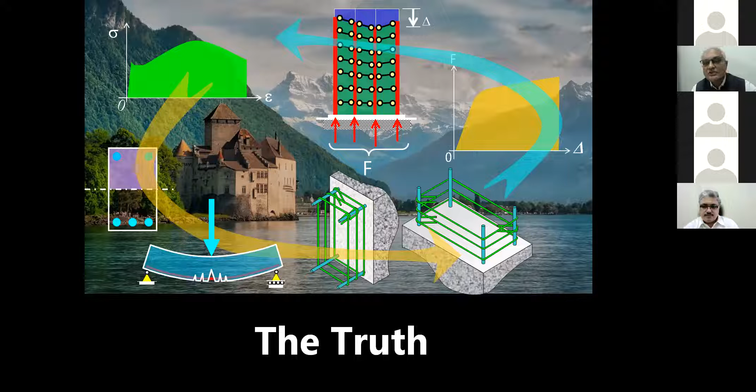So the closed loop design strategy has to come, especially for this kind of structure, which is hinging all its weight on one basket, which is the vertical columns, and those are dimensioned rather miserly. The same, of course, is valid for horizontal actions also. We should protect both of them, and a closed loop method should be mandated to make sure that collapses do not occur for us.

Another important point I want to mention with flat slab buildings is, while you might hear all these words in the market, I must also mention here that repair is definitely not retrofit, but even retrofit is not so easy to happen in a flat slab building. So if you make a mistake at the beginning, there is no way to correct that.

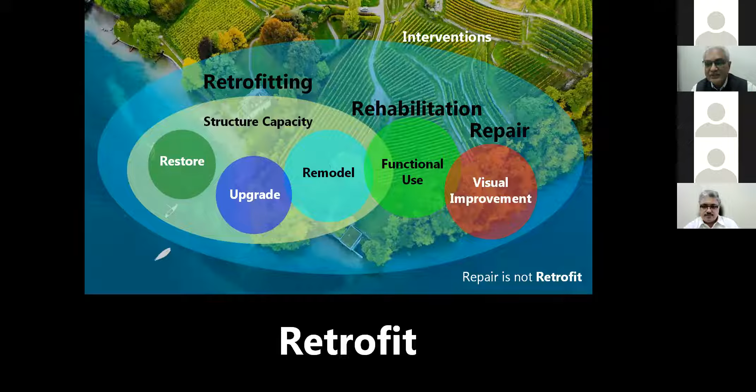You might say, no, I'll shore it, I'll jacket it. Then you have to vacate the whole building, and slowly the popularity of the system will vanish, and the users will again go back to the traditional system. It's important for us to not have it done any other way, but only the correct way right at the beginning itself.

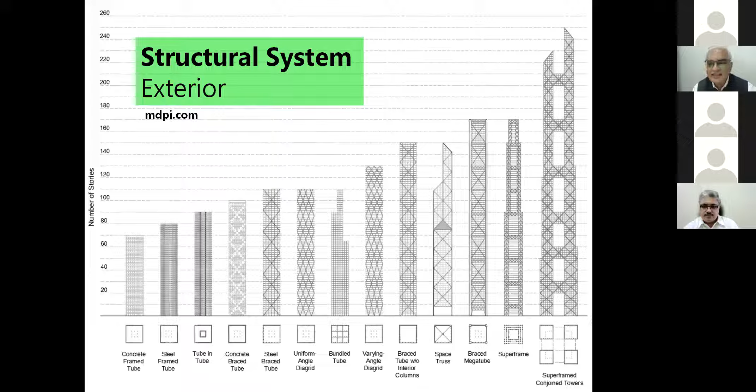When you look at structural systems, the whole lot of them are mentioned for exterior structural frames and systems, and the interior ones also. What is important is flat slab doesn't show up there, because flat slab is an element and not a system. The use of flat slab has to be done more judiciously and not indiscriminately, if you want to protect people and not allow collapses to happen in them.

I think over the years, designers across the world have learned so much, and many failures have also taught us so much, that I think we need to rely on traditional knowledge and go from untruth to truth, and from darkness to light, and from death to immortality. Only then can we guarantee that buildings will survive their design life and not go faster than that.

Many times we shy away from taking the early steps. I think it's important to be bold and take some very difficult decisions for the good of the nation. And that is what I want to say: if you're looking for an India in which no collapses should happen, if that's your dream, I think it's possible for us to build a strong Indian standard in the years to come.

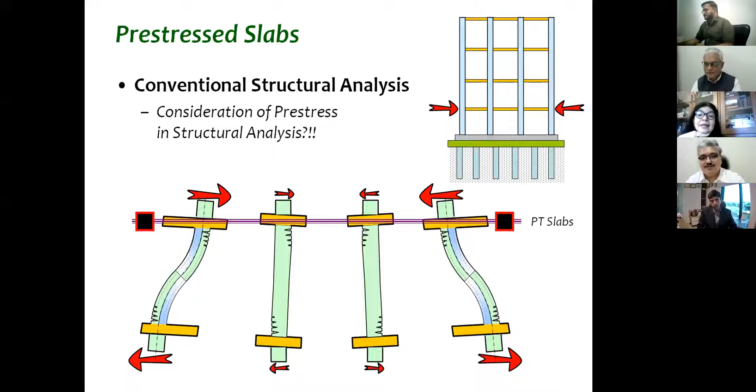I think that's a very good point. But his question was actually something else. He is saying that since we were talking about collapse and integrity steel, I think what he's trying to allude to is, what about the pre-stressing cables? Can they work as the integrity steel?

See, the pre-stressing cable by itself is going to be healthy and happy, but the support that's supporting that cable is not going to be so happy and healthy. I don't think that there will be positive gain, but you must recognize that every pre-stress is causing additional compression in the concrete, and that is taking us more towards the apex point. That is why it's not the favorable situation to be in.

Right, right. So this was a question we all had expected. And can we say that if the codal provisions that were missing in the 1970s for the design of the tower would have avoided its collapse? If I put it differently, if this building had to be designed by ACI 318, even 2014 or 2019, would it have survived?

Yeah, I mean, I don't know, maybe anybody else can say that also, but what I am looking at is, it's not the provisions. It is the engineering that we do with the provisions. Provisions have always been there, and many standards have really nice provisions. But if you dimension the column so small that the bars, so-called specified bars, cannot go through, then how do you blame the provisions for it?

Right. Structural engineering is beyond provisions. Structural safety is beyond provisions. It is about the intuition a design engineer can have. It is about the sense of feeling that the structure is a live facility, and that it is breathing under these different loads, force loads and displacement loads, and that you can feel the load paths. If you can feel the load paths, I think then you'll understand that provisions are not required. For all the virtues, you can't write provisions, right? There are many more virtues for which provisions are not available but are very desirable. Are we willing to practice that is the key question.